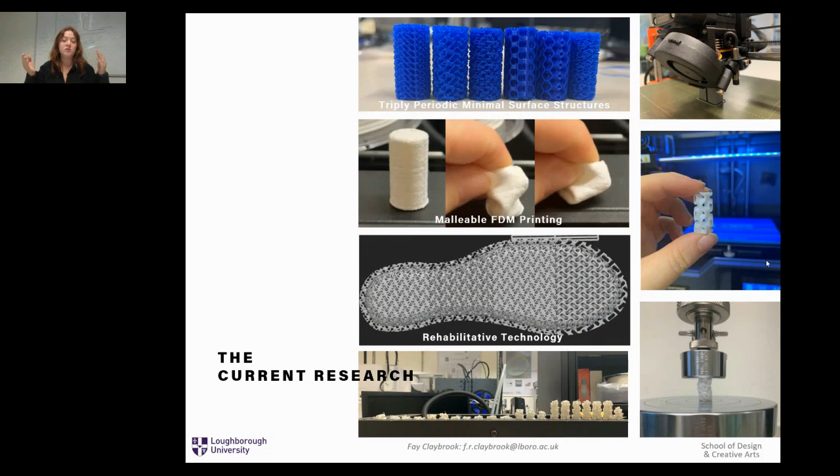So the strut thickness in these structures is one of the most influential factors in the TPMS scaffold. So varying it can vary what weight the structure can withhold. So this independent variable could influence the pressure ranges alongside the TPU that's chosen, for optimization for advanced applications of cushioning and safety, and aids for foams that are currently on the market. Further interest in my work is also into anatomical scanning and optimal data while keeping low cost and easy onboarding if they were to be adopted into medical sectors such as the NHS. Similarly, the pressure data of patients being informative to the insole manufacturing process.

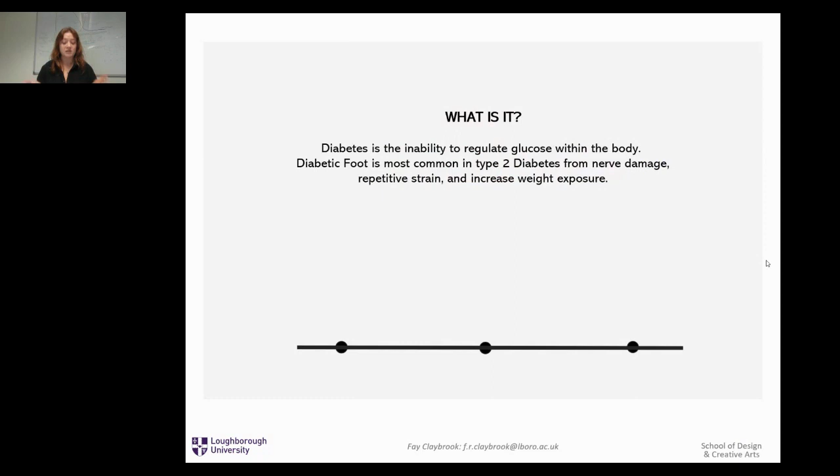So what is diabetic foot? The disease is most often categorized into type 1 and type 2, where type 1 diabetes is the lack and inability to produce insulin, and type 2 is the body responding badly to the insulin that's produced and can't be energized by the glucose that's there in the body. So diabetic foot costs England healthcare more than cancer treatments combined.

And if we look into this, there could be the possibility to save £250 million in the UK. Type 2 is more susceptible to diabetic foot due to their lifestyle choices, and a pre-perceived lack of self-care amongst type 2 diabetics can cause this condition, which is solidified by the increase in ulceration without professional help due to the COVID-19 outbreak, which was reported as 3.9 million people in the UK.

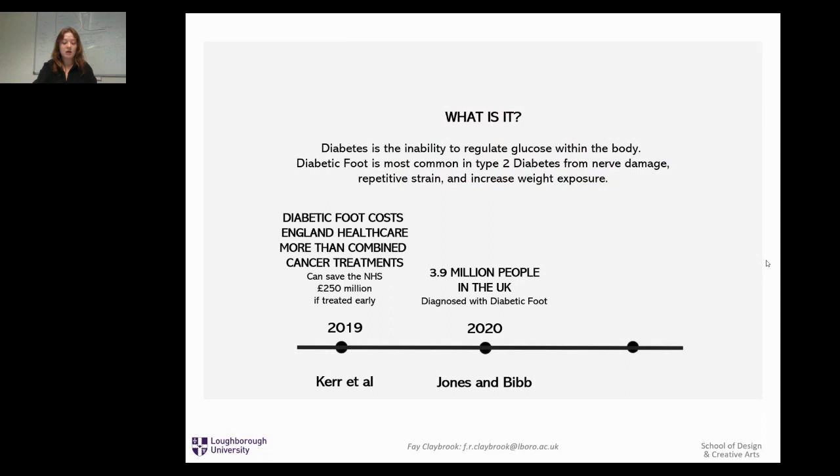So this tends to be men over the age of 50 with high BMI and exposure to diabetes for 13 years plus. An increase in primary care and adaptation of a fast track pathway is needed. So if we can prevent the first ulcer, we could hopefully lower any skin complications and trauma that comes alongside with this.

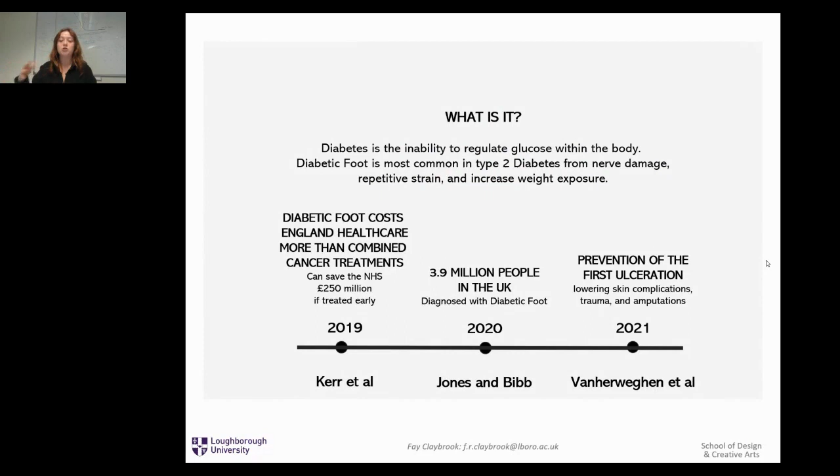So what is diabetic foot? So there's peak ranges that emerge on the plantar surface of the foot, which is indicated in red on the photo on the left. So the plantar surface is the bottom surface of the foot. This can develop hard skin, calluses and ulcers and chronic wounds that diabetic patients are susceptible to. And once this happens, they have the inability to recover because there is too much glucose at the surface area.

So how do these cause issues? The skin is damaged once an ulcer has developed, even after it's healed. However, healing can be difficult due to the imbalanced phases. The high glucose perturbs inflammation and increases infection, which is a major impediment. And due to this, the white blood cells are impaired for the necessary remodeling of the dermal layers and the structural framework of the granulated tissue, and it's all hindered.

Similarly, the pro-inflammatory and anti-inflammatory are out of ratio, so it gets stuck in a cycle and not being able to heal properly because the ratios have changed. Therefore, the need for preliminary stages in diabetic foot is required. The preliminary stages need to be taken seriously, as once the plantar tissue has altered and minor lesions and calluses start forming, there's a strong risk of reoccurrence starting the cycle anew.

If the insoles are manufactured to the feet as a preventative technique, as soon as the pressure ranges of diabetic patients start to increase, this could limit the first ulcer. So an indication of early diabetic foot ulcers is temperature. The foot heats up before it breaks down due to inflammation. So therefore, this early recognition of local temperatures could be used to inform the insole manufacturing alongside the pressure ranges.

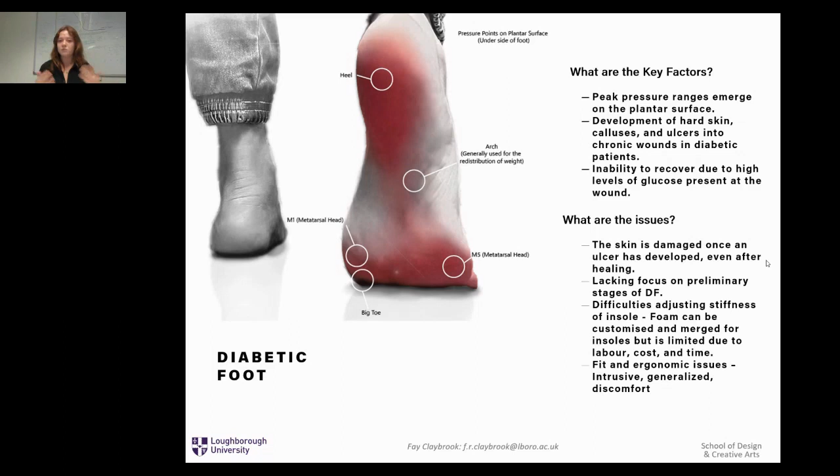And if we use additive manufacturing, this could also improve ergonomic issues, where patients have indicated that arches are too intrusive due to the redistribution of weight, and they find it difficult to wear them. So if you use your hand as an example, the top and bottom of your hand is hard, the middle is soft, and imagine something constantly pressing into it. It's really uncomfortable, and there wouldn't be a high ratio of people wearing these because it wouldn't feel comfortable enough to continue, even if it was helping them.

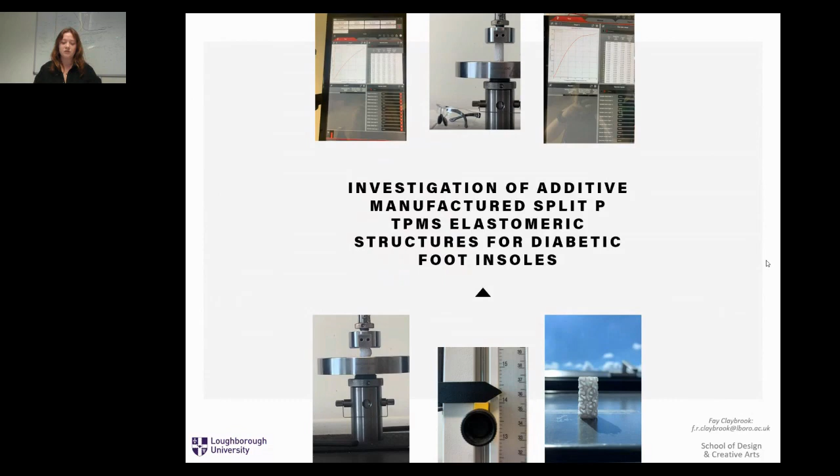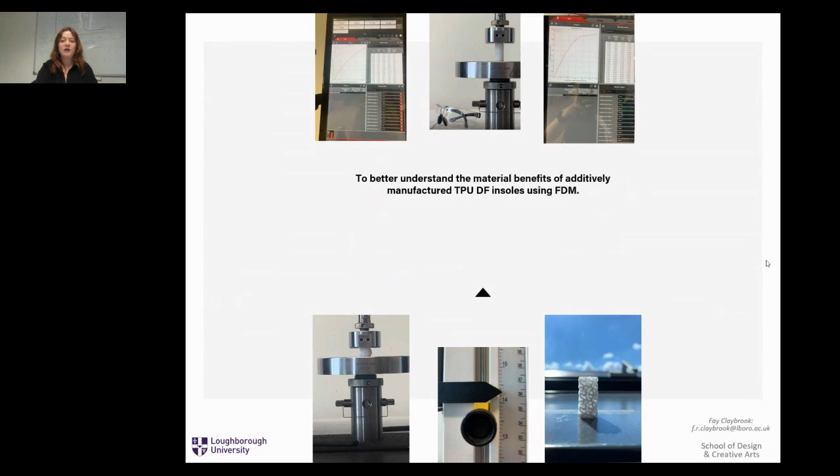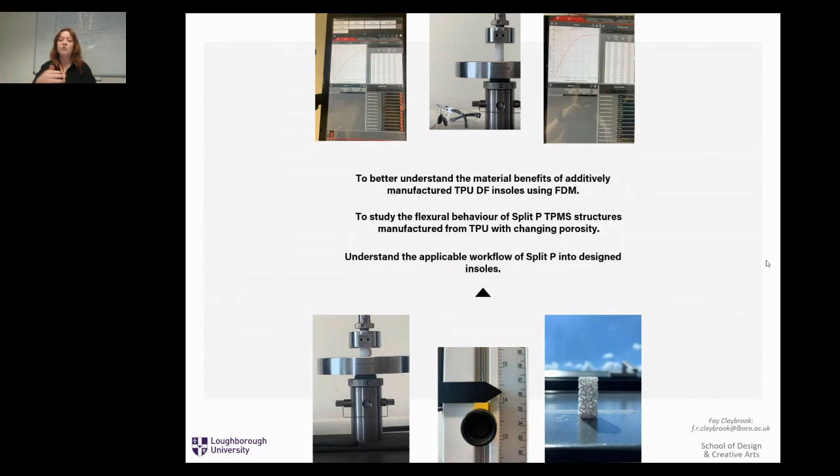So from all this information, it led to my first study, which was the investigation of additive manufactured split-P TPMS elastomeric structures for diabetic foot insoles, where initially only split-P was used as the TPMS structure. The project objectives were to better understand the material benefits of the TPU and the use of diabetic foot insoles, to study how this flexural behaviour can change due to the porosity that we choose and the strut thickness, and then understand how we can make an applicable workflow to design these insoles.

So to understand the applicable workflow, we need to look at the current methods that are being used. So vacuum forming and subtractive manufacturing are the traditional techniques used for insole manufacturing for diabetic foot and for insoles in general, for things such as gait, collapsed arch, and flat feet. The latter, additive manufacturing, has improved these limitations of these processes and shows a clear route for the future exploration of customized insoles.

Subtractive manufacturing is the capture of the foot through digital fabrication. To obtain an anatomical representation of the foot, 3D scanners are used to transpose into computer-aided design (CAD) software. Then the generation of surfaces are made to match the plantar surface of the foot to create the insole.

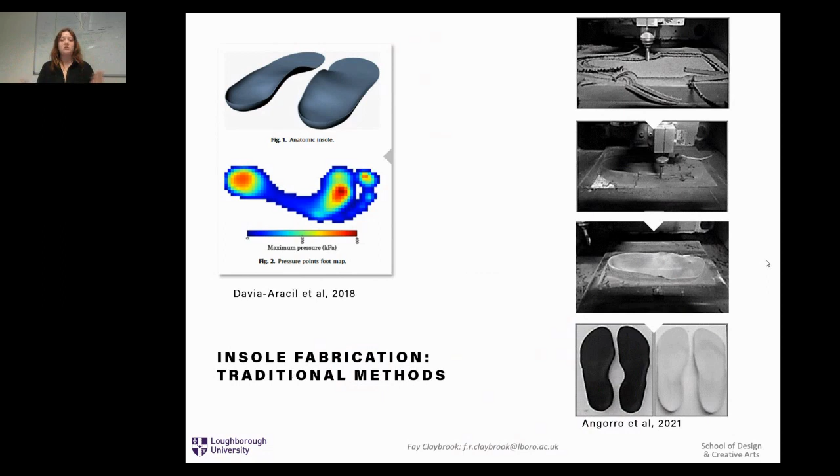Then the CAD file will be sent to the CNC machine and manufactured out of the foam blocks using the subtractive manufacturing techniques everyone is used to, cutting away undesired material and leaving the finished insole. The foam, as I previously said, can be made with different densities and cut to the different regions, and these can be aligned prior to the CNCing by adhering them together and joining them, or they can be made afterwards by adhering and joining them together, depending on the setup of the certain place.

So additive manufacturing is a ground-up approach, adding material layer by layer to create the desired product. Manufacturers can start from minute detail in the millimeter range and can feature complex geometry that subtractive methods wouldn't be able to do with the tooling that they have. The filament is deposited in successive layers from the 3D model on the computer under set guidelines with the slicing software to create the 3D print. It's possible to build any shape and material, and even combination of materials with this method.

And additive manufacturing can be exploited for insole manufacturing through the varying porosity, flexibility, and absorption of pressure exposed on the plantar surface of the foot. So this digital workflow would create a more detailed approach to the manufacturing process that is required for the intricate pressure ranges of the foot. The data can be collected, and then the correct structure can be chosen to withstand the pressure range that is susceptible to that diabetic foot and that patient.

This can then be implemented into an insole and customized to the patient in the exact way that they need, in the exact way that the structures are tested in this study, just to the shape of the foot rather than the standardized size that was needed. So the process would go through the same steps with the CAD and the 3D printing, but rather than the structure, it would be the desired insole.

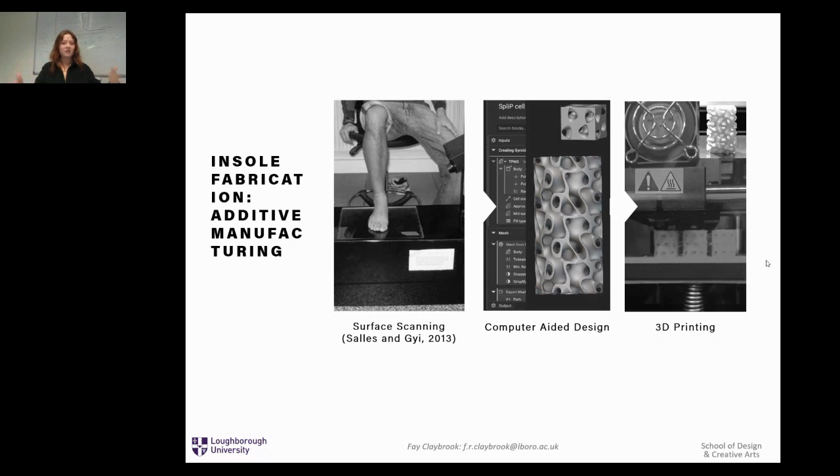So further research into optimal scanning techniques available at a low cost will be explored at a later date to further this process of research, but currently I'm just looking at the TPMS structure and the different porosities to focus on how these can adapt for the different pressure ranges of the foot. This has been shown in a proof of concept insole that you will see shortly at the end of this presentation to show the intricacy in the results section.

So given that there is limited investigation of elastomeric formed TPMS structures, in this preliminary study, the Split P TPMS structure was chosen, and from the resulting compressive properties with varying porosity using TPU and FDM additive manufacturing fabrication, we can create an image of the capabilities of what this can do.

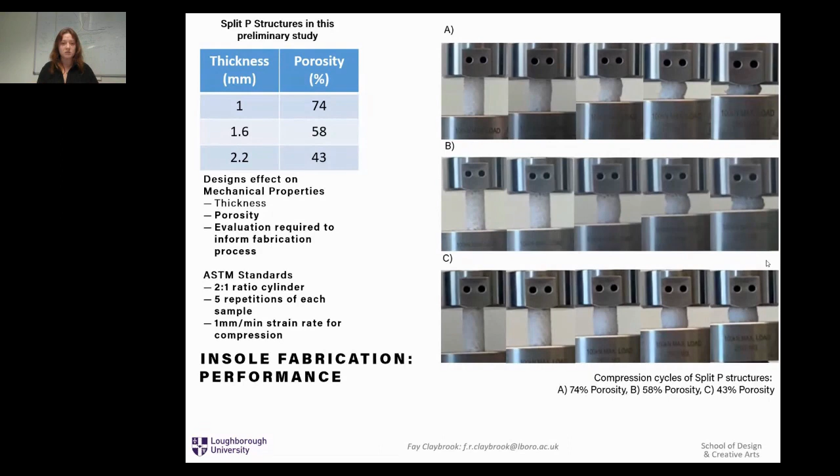So TPMS structures are a new approach for the replacement of this medical grade foam, and there is only one other study, by Holmes et al. 2022, that tested the gyroid structure, and they reported that if they change the internal porosity of these structures, the mechanical loading conditions can be tailored to match the compressive properties of foams that are currently on the market used for diabetic foot insoles.

So for this study, each sample was compressed under the uniaxial loading machine to see the stress-strain the structure could withstand, and therefore the pressure ranges of the structure before permanent deformation. The ASTM D695-15 standards were followed, where each porosity had 5 repetitions to find the averages and the anomalies. And similarly, the height was kept at 30 millimeters and 15 millimeter diameter for a 2-to-1 ratio and compressed at a strain rate of 1 millimeter per minute due to the required examining of these structures.

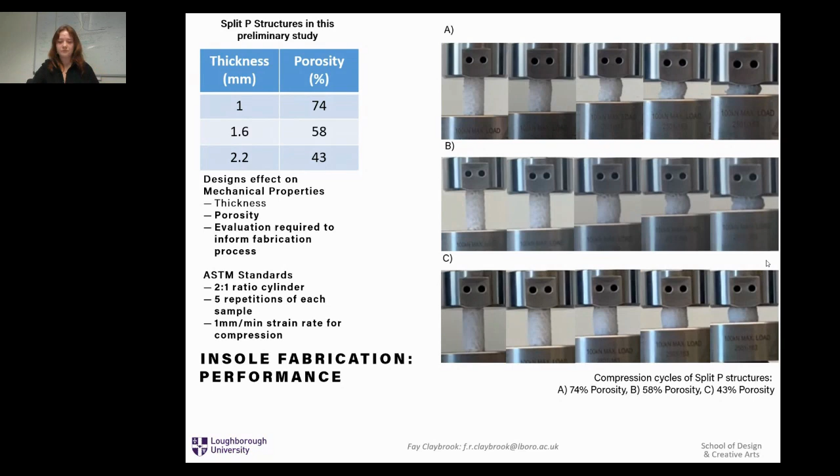So elastomers have complex mechanical properties from their deformable nature. Typically, more rigid materials will begin to deform with a linear profile before, at a critical point, the strain begins to increase for a near constant stress, which is a characteristic yield point of a material. This is a typical point of densification for compressed scaffold structures, whereby effectively all design porosity is removed from the structure. However, for elastomeric scaffolds, yielding does not occur and the scaffolds are able to return to their original form as long as there's no hysteresis in the structure.

So in the present study, to compare the compressive properties between these elastomeric scaffolds that were designed, we defined the maximum compressive stress: a point where the porous test structure began to collapse while permanent dense deformation was absent. In a rigid material, it would go linear, collapse, plateau, densification, or it would snap and break. Whereas in this material, due to the air being collapsed out of the structure, I'm defining it between the linear behavior and the collapse plateau.

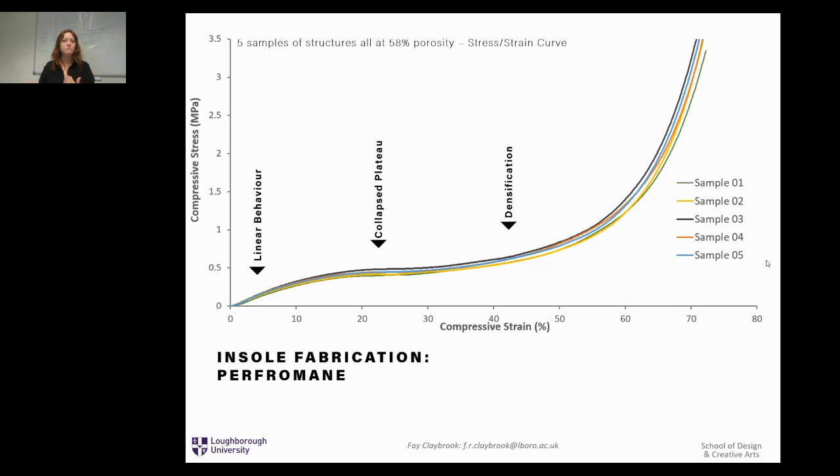So if you made a little triangle, that's going to be where the maximum compressive stress is. So it doesn't go into the densification, getting rid of all of the designed gaps and air out of the structure, because then it would just be based off the solid material. Hopefully that makes sense.

So what I found was that there was a clear correlation between the porosity and the maximum compressive stress, whereby with increased porosity, there was a lower measured maximum compressive stress. This was also reflected in the calculations for the compressive modulus, the Young's modulus, which imply a reduction in stiffness for increased porosity. It was noted that the calculated error increased for the structures with increased porosity for both maximum compressive stress and the compressive modulus.

So the increase in the error values could be attributed to the unpredictable nature of the buckling and twisting and how the material is deposited in these structures, or there could be slight deviation in the interlayer adhesion, which could lead to unpredictability in how the structures deform when under a compressive load.

So if we link this back to the study that was done by Holmes et al., it was found that the gyroid TPMS structure that they tested was comparable to the split P that was used in this study. The gyroid structure had approximately 0.125 MPa at 10% strain, and comparatively, the split P in this study was found to have 0.2 to 0.3 MPa, which is twice the compressive stress loading capacity.

And comparing both of these to the compressive properties of typical medical grade foams on the market, the compressive strength of the medical grade foams on the market can cover 0.175 to 0.35 MPa. Therefore, the compressive stress of the TPU split P used in this study is within the ranges of the compressive stress found in clinically utilized foam materials on the market.

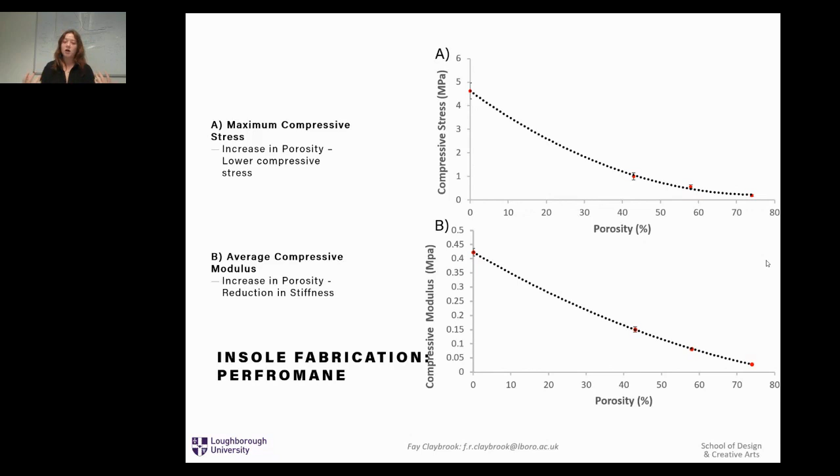And even if we wanted to take this further, we could reduce the cell size and the strut thicknesses to get an even wider range of data. The compressive properties can then be tailored regionally to give an insole. So in theory, this can be adjusted and tailored to the unique loading characteristics of the individual. This showcases the use of a smart insole whereby pressure ranges can be adjusted to key contact points of the foot. So this is rather a crude model of a foot insole, saying there's only 4 main regions.

However, the regions of the foot could be divided further into more intricate detailing. So you could have 10 different regions of the foot with different structures that were required, and you could even have it for each metatarsal head if that is what you desired. The structure can be easily merged as the pattern, the baseline, is the same, and it's only the porosity that changes, meaning there wouldn't be a weak point within the insole because they have the same basic guideline, creating a watertight structure.

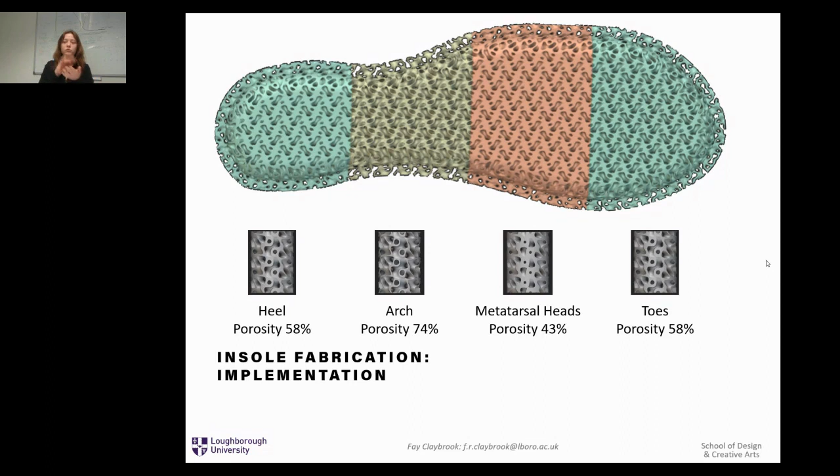So scanning and pressure data can be measured in the initial data collection from patients and compared to the collected pressure ranges of each of these structures before the maximum compressive stress. Then the use of the plastic plateau before the maximum compressive stress is great for energy absorption as the porosity is compressed and released after impact, allowing the energy to be stored within the structures under the foot while being able to withstand the repetitive load of the foot when walking and in continuous physical movement.

So the future work that is going to be carried forward is to conduct testing of the proposed insole by physically manufacturing it, examining the use of scanning data for customization of pressure regions in a real world context, and to understand the effect of hysteresis on the insoles from repetitive high pressure exposure. So further research has been undertaken.

So the future steps that I've taken forward through additive manufacturing are the tuning of flexible materials for other uses of TPMS structures. So I've also looked at gyroid, diamond, and Schwarz. And with the further use of TPU material, I've tested 2 different Shore hardnesses to understand the different pressure ranges and scope that this can hold and the capabilities of what this material can do.

So the generic TPU 90A Shore is what was used with the split P TPMS structure in this study once again. And then another hardness of 60A TPU was used, which is an extremely malleable material for FDM printing, and it is quite difficult to get the parameters for the loading capabilities initially.

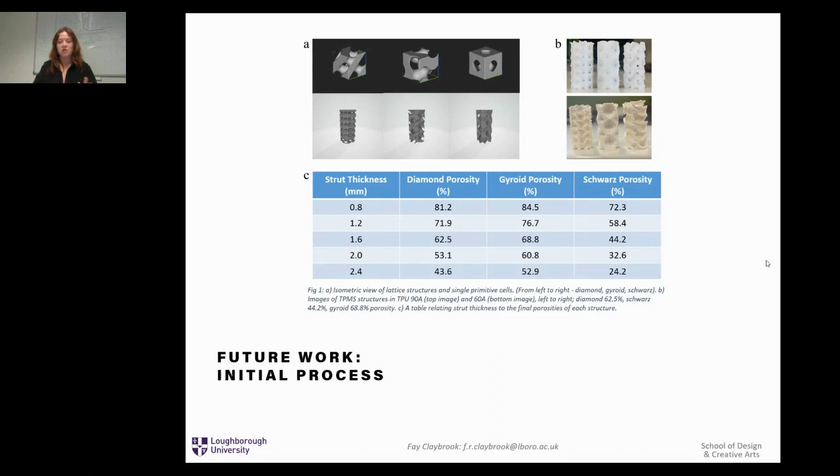Also, a wider range of strut thicknesses were chosen to create a bigger database, which could be worked on to input pressure ranges and output the correct porosity for the patient's specific needs. I thought I would show an image just in case people were confused by what I meant by porosity in relation to strut thickness.

So you can see as the strut thickness of a TPMS structure gets wider, the holes and gaps that are designed in them get smaller. So this could possibly influence the collapsing of these arches and the loading capacity. Then the analysing of this data is still being managed to ensure that the correct guidelines and the eventual database that will be formed from these structures is going to be reliable and able to be replicated into an insole from the pressures that the structures were capable to withstand on the uniaxial loading machine.

So the compression samples for this study were taken the exact same as the split P structures, but instead of 5 samples for each, 7 samples were made. And the initial plan was to do this for both TPUs, but due to 60A being so malleable, there was a lot of pressure buildup in the nozzle, so that had to go to a 0.8 millimeter nozzle rather than the standardized 0.4, and could only replicate the larger strut thicknesses, so the 3 on the right, the less porosity, so the 1.6 millimeter to 2.4 millimeter strut thicknesses.

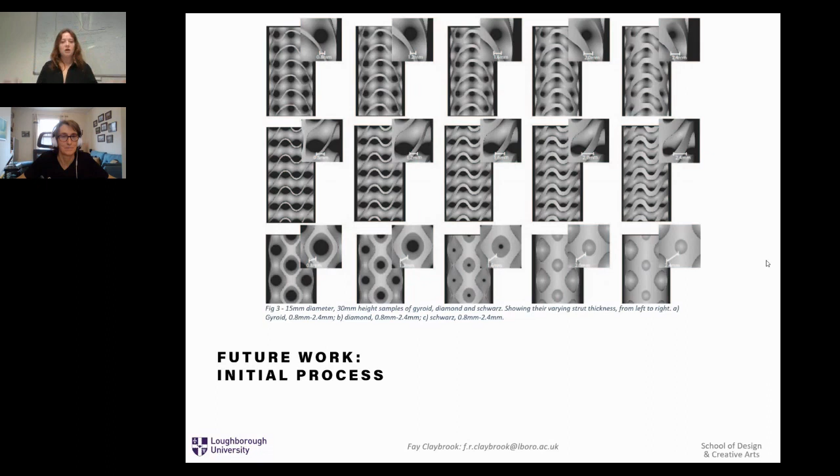So overall, there was the 5 different porosities for 90A TPU and 3 porosities for 60A TPU, and the 2 different materials with 7 replications each, which equals 105 samples for the 90A and 63 samples for the 60A TPU. And the current information I can tell you is the overall characteristics of these samples acted the same as the split P, where the higher the porosity, the reduction in compressive modulus and the maximum compressive stress, which you would expect from the previous study and the design of them. Thank you. This is currently what I'm doing.

That is fascinating. Thank you very much. That is an incredible insight. And I've got a few questions waiting for you here. Okay. Yes, and we're having a round of applause as well, digital applause.

So there's a question about what kind of materials are you using in the research and the challenges that you face? What are the challenges with the materials? Yes. So with 90A, originally there was a lot of fine tuning. With the use of TPU materials especially, there's a lot of stringing when depositing from one side of the bed to another side of the bed. So it was a lot of honing in on how to reduce the stringing. So reducing the speed, the travel speed, the wall speed, everything, but mostly controlling it in the CAD software beforehand.

So rather than controlling it in, let's say, Prusa Slicer, for example, I controlled it in nTopology, so made no infills or anything. So I had a lot more control of exactly how fast and where it would deposit the material. And the 60A was a lot more complicated because there was a lot of bending and buckling while loading. So I had to create a customized 3D printed gap. It was a triangle funnel for the material rather than a parallel channel. So once it caught, it was squished and it wouldn't wind and bend and break. But most printers have a designed capability for that and loading gears at the front. It was just the one that I'm currently using I had to create the funnel for.